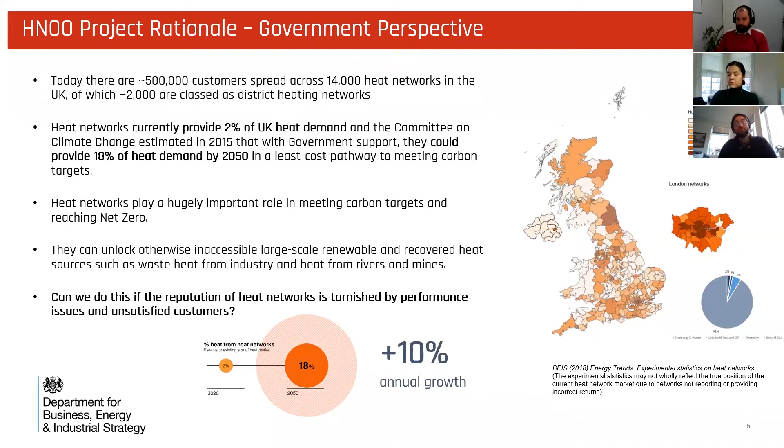However, can we do all of this if the heat network's reputation is tarnished by performance issues or unsatisfied customers? This is where the Heat Network Optimisation Opportunities project came along. So what's government's role in supporting existing heat networks? We had done in the past a number of discrete studies into some of the challenges with existing networks, but it's been a very difficult process within government to see how we can support existing networks effectively.

And what is it that is really needed? The HNOO program really gave us an opportunity to learn and understand what the optimization opportunities are. So this isn't only networks that are really struggling, but just ones that could do a bit better. Why do these opportunities exist? What can be done about them? Why is it not already happening? And what is the decarbonisation pathway for existing networks? So if you go to the next slide, please - what did we do?

We funded 21 separate studies across 21 separate sites, over 3 organisations, of which FairHeat was one, each with a unique approach to looking at optimisation opportunities. We wanted to present the findings as a technical business case with the project sponsors, typically the site owners or operators, then discuss with them what's going to happen next. What was really important for us in government was creating a dialogue between the project sponsor, technical consultants like FairHeat, and ourselves, to understand the issues and what we can do to help each other overcome them.

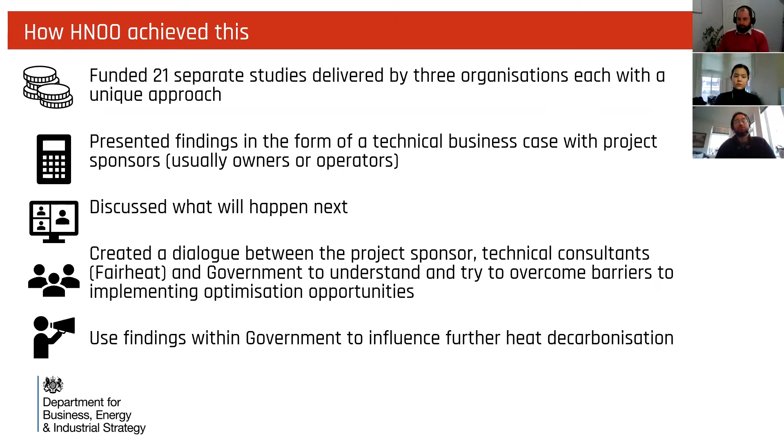The requirements we had were that it had to be existing residential heat network projects, both communal and district heating. They obviously had to have suboptimal performance, so there were opportunities to improve that. Another key requirement was that there'd be a lot of data available, because there needed to be objective analysis done, and it would really help build a business case based on hard numbers.

So the outputs of the project for each of the projects we worked on would be a robust business case for a series of potential packages of works. Those packages of works had to be cost effective, and they had to demonstrate that there'd actually be a quantifiable improvement in the performance of the heat network.

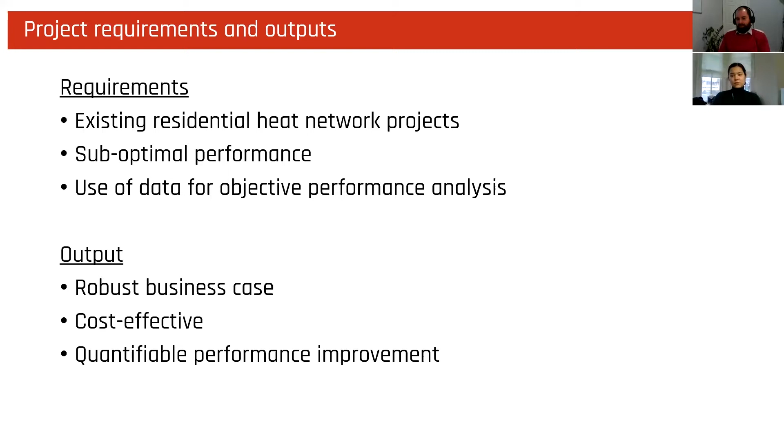So we approached a lot of organisations that we work with currently and asked them if they had any heat networks that fitted the bill.

The reasons that came back from clients about why they would like to include their heat networks were very high electricity bills, that some of the networks had equipment that was sort of 40 years old and the whole system was reaching the end of its technical life. There was a lot of maintenance issues with main equipment, boilers and HIUs in people's dwellings, lots of resident complaints and customer dissatisfaction, and they believed there'd be potential to improve the performance of those systems.

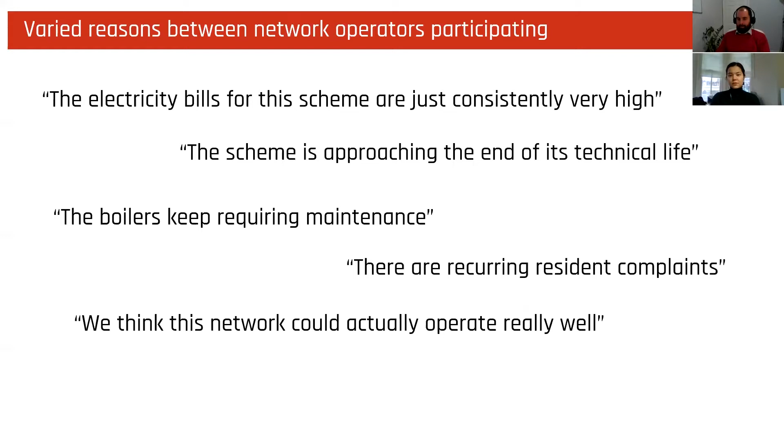Okay, so in total on this project, Joel mentioned that there were 21 projects in total that BEIS worked on. Of those 21, we worked on 10 of them. Of those 10, we were aiming, which again was a request from BEIS, to be as varied as possible, because we wanted to capture as much of the market.

So we looked at developments built sort of 50 years ago up to developments that were literally handed over the year before. Again, on scale, 74 units, a typical communal heating system in London, those kind of scales, all the way up to 950 dwelling units, which were big district heating systems. In total, across those 10 projects, there were 3,232 dwellings that we looked at as part of the overall project.

Of those 10, 9 were district heating networks. As Joel mentioned earlier, that meant there was more than one building connected to that heat network. In many cases, it was only 2 or 3 buildings - these weren't big district heating systems - and one of them was a communal network.

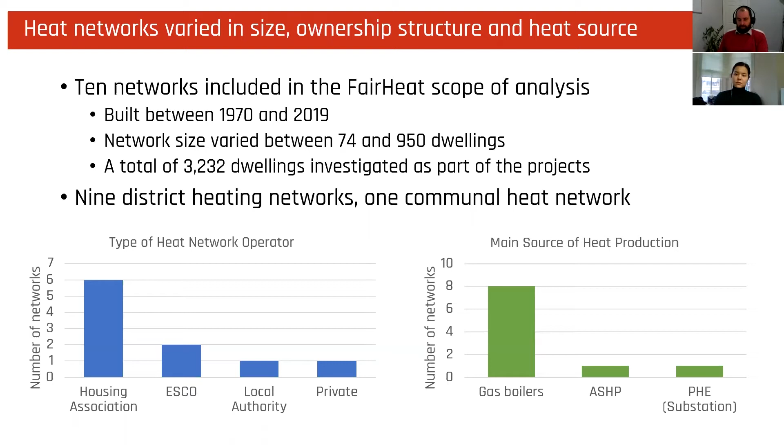We covered a broad range of heat network operators - social housing associations, local authorities, but also the private market, so private developers and ESCOs. The main heat production, these are legacy systems, unsurprisingly, around gas boilers were dominant. There was one air source heat pump project and one that was actually fed off an existing district heating system, so it had a plate heat exchanger.

The project methodology is we did an audit of the sites - that's data going to site, going to dwellings, going to the energy centre. It's very important to be hands-on, actually physically see how the networks are working.

Then there was a data gathering exercise where we collected operational data from the Guru pinpoint system and from any BMS systems they had on site. We reviewed the assets, the equipment installed, reviewed maintenance logs. We also interviewed or spoke with O&M contractors to understand what the legacy issues were on that site.

And then through that process, we could identify optimization opportunities by building an actual model of the heat network, and then coming up with a series of interventions and testing those interventions on the heat network, so that we could objectively see what impact that would have on heat losses on the system or the performance of the heat generating equipment.

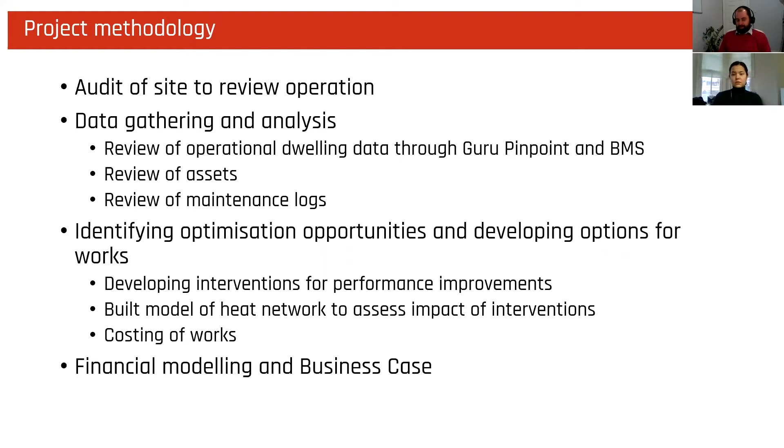And then we provide a full costing analysis of the capital cost to carry out the works. That information then went into financial modelling and preparation of a business case back to the sponsor. That business case would include typically 3 work packages, ranging from easy wins to very work-intensive improvements. So easy wins are things that could be implemented quickly, and then more work-intensive programs that will typically include things like replacing capital equipment.

On each of those work packages, we do a financial analysis which tries to incorporate all costs possible - not just capital costs of equipment, but also labor costs, project management, internal costs of the organization to manage the project, and ongoing management and maintenance costs. Through that, we produced net present value and IRR results for the different work packages, simple payback, and a sensitivity analysis of the project.

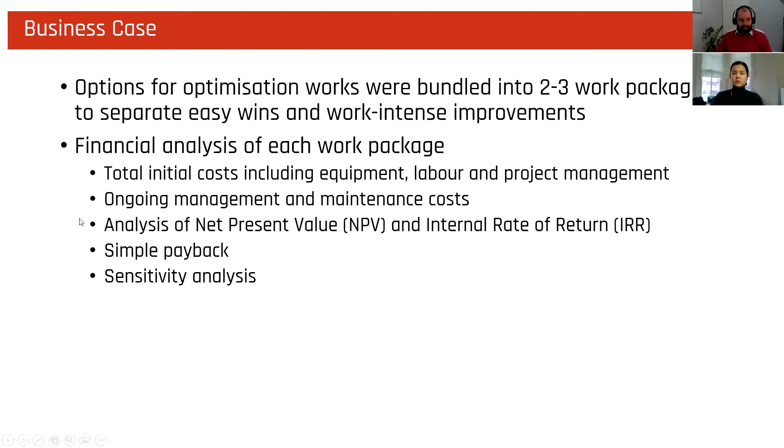And I'm just going to pass over to my colleague Lina, who headed up a lot of the program for FairHeat on this side, and she's going to run through some very high-level results.

So, okay, can everyone hear me? Hello? Yes, I can hear you. Perfect.

As mentioned by Tom previously, the suggested works investigated as part of this program were bundled into different work packages, where work package 1 would generally consist of the lighter intervention works, and work package 3 would generally consist of the most comprehensive works. Across the program of projects, the simple payback for improvement investments was on average less than 6 years, and for work package 1 the simple payback was on average less than 3 years.

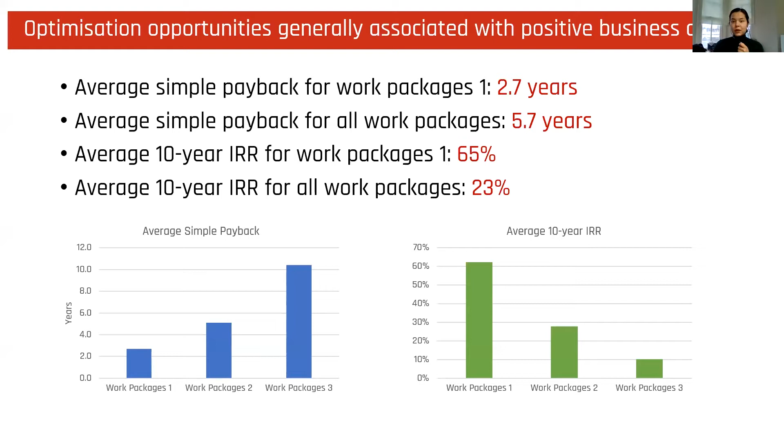Aside from being associated with quite attractive business cases, carrying out performance improvement works also has the potential of significantly lowering costs back to residents. We can see that already with work package 1, a significant annual cost saving is enabled. If we split that cost saving per dwelling on the network, we can see there is significant potential for cost savings to be carried over into lowering the annual cost for residents and end users. As more comprehensive works are carried out, the annual potential cost saving per dwelling increases.

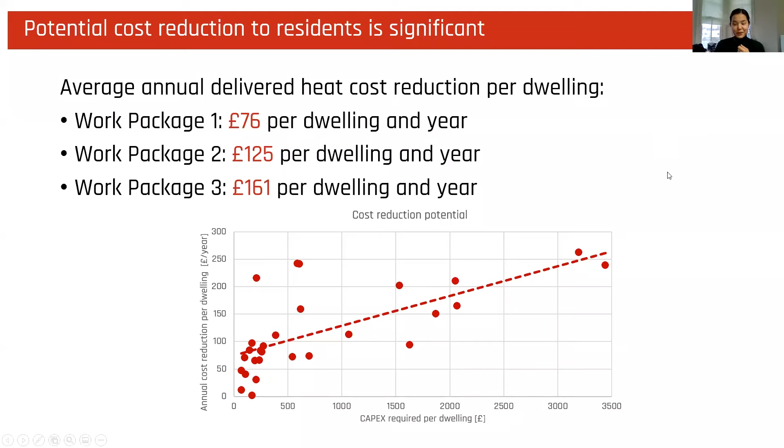Looking at some of the more specific interventions that are low cost but contribute with easy gains, we can see that in many cases there was oversized equipment, where pipework and radiators were found to be oversized, meaning system temperatures can be dropped without needing any more invasive works across the network. This is an item that will be further developed in detail by my colleague James later on in this session.

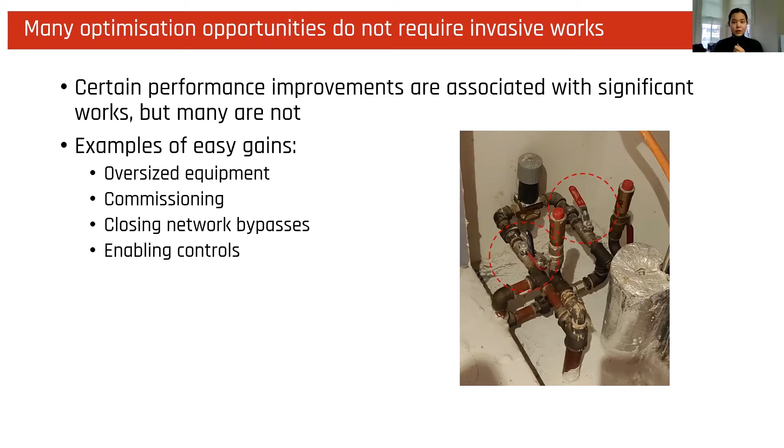Two other very common work items that were suggested, which are relatively cheap and very easy to enable, are enabling controls and carrying out commissioning of equipment.

We could see that 9 out of 10 networks had uncontrolled pump operation, which results in increased electricity consumption and cost. 8 out of 10 networks had uncontrolled plant operation, which results in decreased generation efficiency. 6 out of 10 networks had open network bypasses, which drives return temperatures, heat losses, and pump electricity consumption. 8 out of 10 had large portions of uninsulated pipework on the network, which drives heat loss. And all 10 networks investigated had instances of poorly performing HIUs. If you remember from the last slide, these are all items which can be rectified at a relatively low cost.

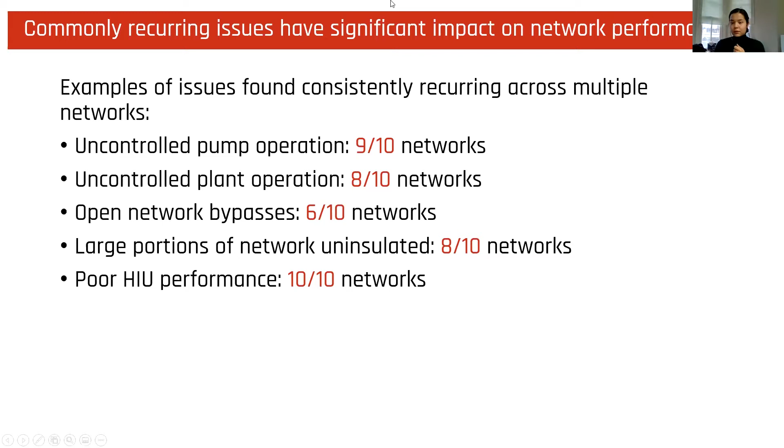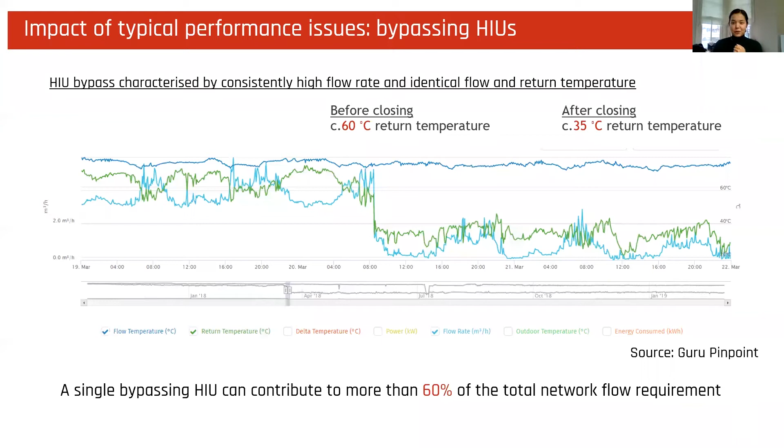If you're wondering why I'm going quiet, it's because there's a slight delay in me swapping slides over. There we go.

Most of the interventions we investigated were associated with positive business cases, and the analysis we carried out by default, with results like simple payback that I presented earlier, did not consider the cost of carbon, which is a theoretical figure aimed at addressing the cost of the negative environmental and social impacts of carbon emissions. Using figures for cost of carbon based on the Green Book by BEIS, we were able to include the cost of carbon in alternative business cases for each of the projects and work packages, in order to take into consideration and place value on the potential decarbonisation that would be enabled by the performance improvements.

We can see that if we take the cost of carbon into consideration, all the business cases improve significantly. For example, for work package 1, the average simple payback is reduced from 2.7 years on average to 1.9 years.

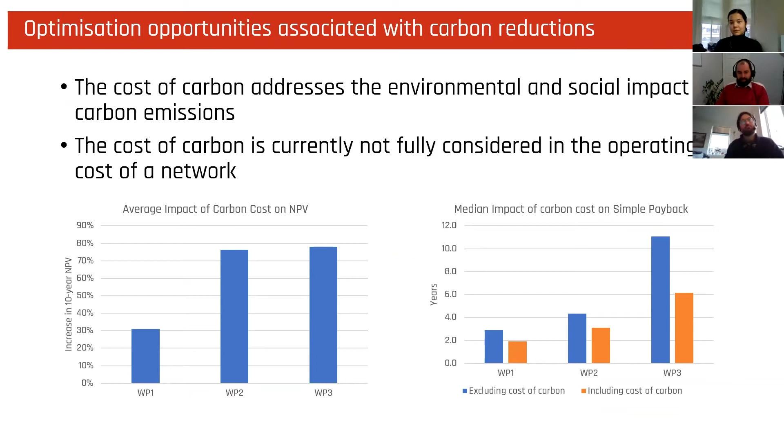Excellent, thank you, Lina. I think that's just going to hand back over to Joel. So that was the conclusion, the results from our perspective. I think from BEIS's perspective, Joel, what were your conclusions and what were your next steps?

So, that was really helpful. Thank you for going through all the detail. As a fellow engineer, I found this whole project really interesting, and I was really grateful that I wasn't the one running around in the plant rooms as well. So I got the benefits without getting covered in cobwebs.

So for BEIS, there are several elements to the conclusion. One is the opportunities already mentioned—these energy, emissions and cost savings are really a benefit to everyone. There are direct benefits of saving money for either the operator or the end user, the heat customer. There's also an air quality benefit as well as a carbon benefit. As I'm sure we're aware, a large number of these heat networks can be in quite densely populated areas, which would have other air quality issues. So it's good to know there are things that could be done fairly easily that can alleviate some of these environmental and health issues.

There were lots of common themes, or you could call them common problems or common solutions—depends which way you want to look at it, glass half full or half empty. As highlighted by Lina's slide, the number of sites that had fundamentally fairly straightforward problems that could be solved was really interesting. And what's really good about it, although it's a shame they exist, is that we could then utilize these common problems and solutions to make a really big difference across the whole sector, because through a bit of guidance and support, these things can hopefully be significantly reduced.

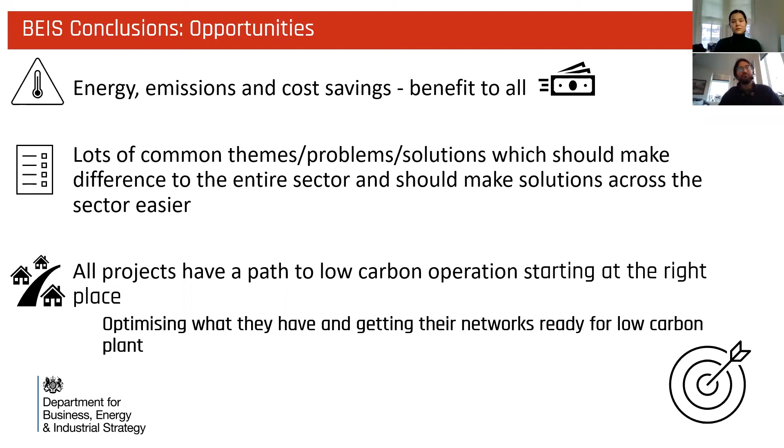So within the conclusion, there were other challenges. It goes without saying that COVID caused some pretty significant challenges all round. This project started well before the first lockdown, and there were a number of points where we had to review how we were going to move this forward. I'm really grateful for the team at FairHeat because they did a fantastic job. They didn't let the inability to go and do all of the investigations they wanted to do get in the way of being able to deliver really high quality outputs that can make a significant difference to the sector and to the sites that they looked at.

There were technical challenges, but most of the technical challenges I think are solvable. The reports show that, and I'm sure at some of the other FairHeat sessions they talk you through some of the quite solvable technical problems. The ones that really became quite interesting in terms of a stumbling block, probably for more people - as an engineer I quite like the technical problems - were these institutional ones.

So there are challenges on how the structure of the organization can prevent the receipt of benefits. What I mean by that is that if you're not allowed to hold on to a financial benefit from doing something, it's very difficult for you to make a case to invest. Or even if your organization can take benefit from some savings, if it's set up in a way where you've got a maintenance budget on one side, a capital works budget on the other, and another side that deals with ongoing operating costs, and they don't talk to each other, you then have a very difficult challenge of saying, well, this project can pay back in 5 years - can I have some money, please? That's a really interesting challenge, and it's different for each organization we worked with.

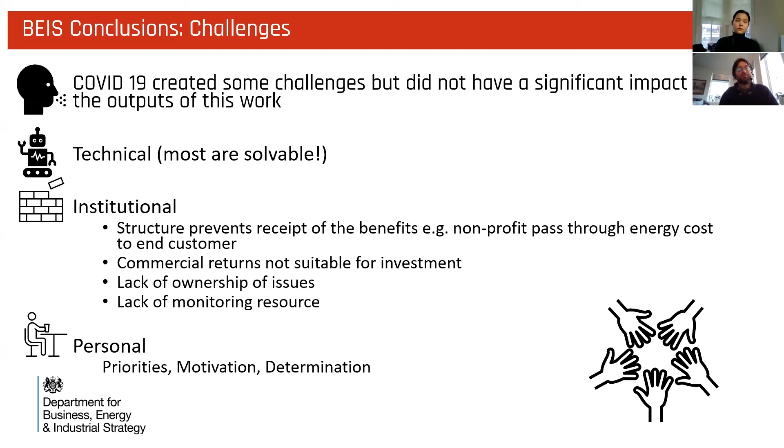So what's next? Some positive stuff, because this was a really interesting piece of work that we did, and we got some really good findings from it. So there's a watch-this-space on a program called the Heat Network Efficiency Scheme, which is the follow-on from HNOO, Heat Network Optimisation Opportunities. We're developing a project to support the part funding of operational improvements in these networks - finding a way to overcome some of the commercial challenges around the recommendations put forward by the reports, like the ones done by FairHeat and others in the market. We're going to announce more details on that later this year, but as seen from the data here, that can significantly reduce emissions and costs for people.

A really big part is feeding back these findings into future regulation and funding programs - the Heat Network Market Framework, and the Green Heat Network Fund, a £270 million successor to HNIP that can be used for low carbon plant upgrades. I was asked whether there's an issue with requiring reasonably low flow temperatures, sub 60, and the findings from this work allowed me to answer with reasonable confidence that most of the projects we looked at had little if any problem reducing flow temperatures to 60 degrees. That was a really interesting finding that fed straight back into other areas happening within government.

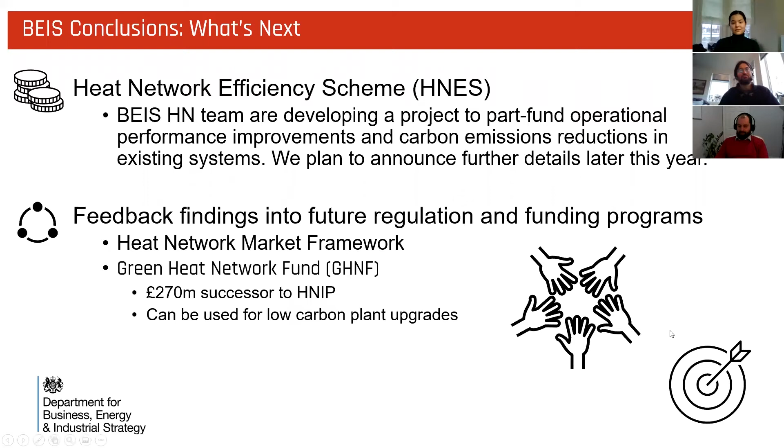I just wanted to say there's a huge amount that went on in HNOO, as you can imagine, with 10 projects of different types, lots of common themes, but also lots of different issues that we discovered. We've got 20, 25 minutes here, and we're going to have an opportunity to go far more in depth into this in 2-3 weeks' time.

We're having a morning coffee webinar on Wednesday the 17th of February, which will also be attended by BEIS, where we can go into a lot more detail about what we found, what recommendations we have, and the challenges. Thank you both - you'll stay on for the panel discussion, but thank you both for your input.

Another comment you made, Joel, segues perfectly into the next presentation - about how to optimize heat networks and existing systems, and now, still on the subject of existing systems, how are we going to make them compatible to integrate with low carbon technologies? As we saw, most heat networks at the moment run off gas and fossil fuels - how are we going to transition that? A lot of it is around temperatures and optimizing the performance of existing systems. So moving on to the next presentation.

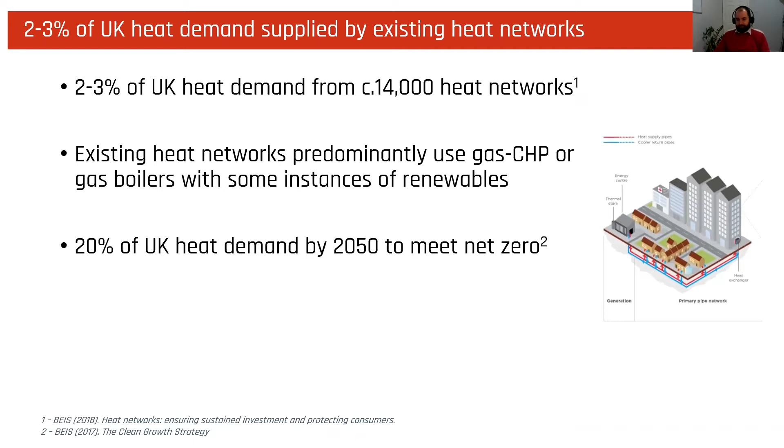So what that means from a generation perspective - and apologies for hydrogen fans, but I'm going to completely ignore hydrogen here - that probably means there's going to be a significant electrification of heat, through heat networks as well as through electrification of heat for individual houses.

Why is that? This graph shows the carbon intensity of UK electricity since 1970, up to just pre-2020, and then a series of projections from 2020. It shows a drastic reduction, particularly post-2010. Between the mid-90s and 2010 there wasn't much movement, but in the last 10 years there's been a significant reduction in the carbon intensity of the electricity grid.

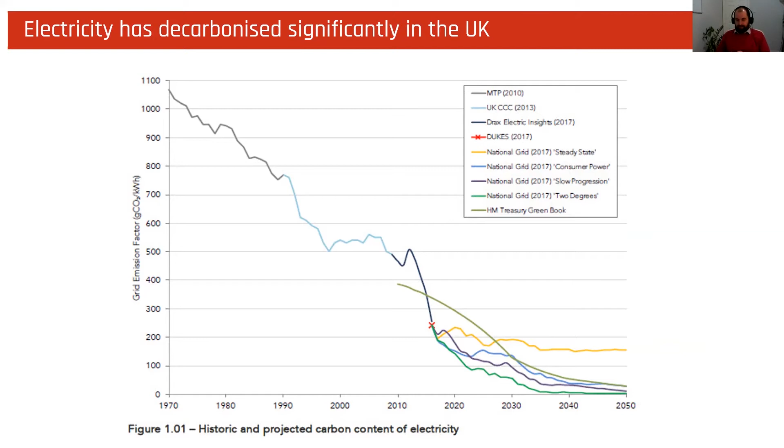What that means from a heat generation perspective is that heat pumps - this graph shows the carbon intensity of heat delivered to a resident with some assumptions. The blue line is gas boiler: natural gas going into a boiler at 85% efficiency, a good rule of thumb, with 15% losses on the heat network, which effectively means delivering a carbon intensity of heat of about 0.3 kilograms.

There could potentially be some decarbonisation of the gas grid, but it's not likely to be significant towards net zero. So assuming that stays fairly stable from now to 2050, in comparison, the orange line shows the carbon intensity of heat delivered to residents on a heat network via a heat pump.

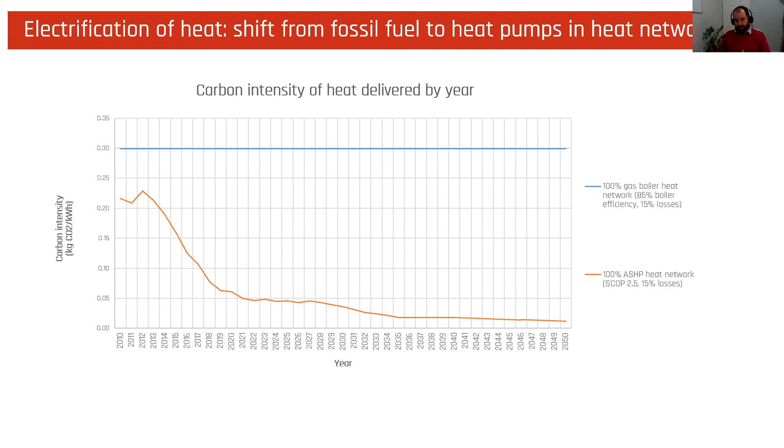This particular example assumed an air source heat pump running at a seasonal COP of 2.5, which is actually very conservative, with the same heat network losses. You can see already at 2020, the carbon emissions from an air source heat pump compared to a gas boiler is significant, and that's only going to drop getting closer to net zero by 2050.

However, we can't just fit heat pumps into legacy buildings. Legacy buildings tend to have higher operating temperatures, whether that's due to hot water cylinders or radiators, and the fabric efficiency isn't so good, so they need to operate at higher temperatures.

Unfortunately, the efficiency of a heat pump is governed by the temperature that you produce heat out of that heat pump. We've taken a very common heat pump on the market, looking at the efficiency - the COP on the left axis is effectively the efficiency of operation. If you have a COP of 3, you put in 1 unit of electricity and get 3 units of heat out.

For example, at an ambient temperature of 10 degrees outside, that same unit, if it was trying to generate heat at 65 degrees, would be operating below 2.5, something like 2.3. If it was only having to produce heat at 55 degrees, it would be up near a 3. This has significant impact on the cost of heat to residents as well - the lower the COP, the more expensive the heat generated by that technology is.

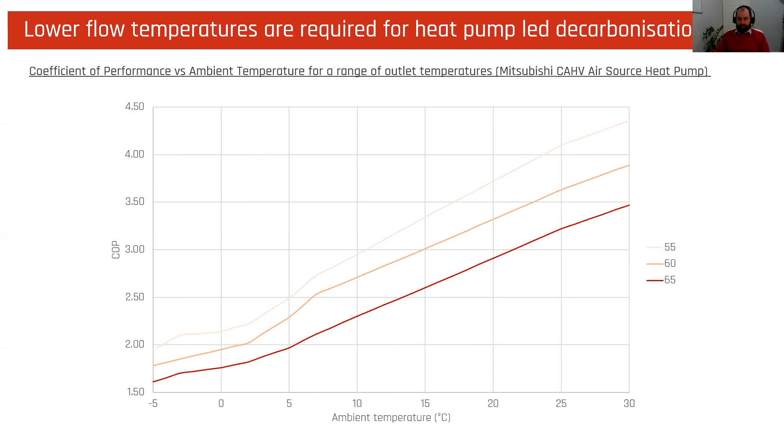So just to move away quickly from heat pumps - we can see the challenges: we need to get temperatures down. Here's how we've approached getting networks to the stage where heat pumps can be used with that heat network - we go through this process.

First, we measure the performance of the heat network, usually through data if we can get it, or as with the HNOO project, through site audits, observations, and interviews. Once we've gathered that data, we analyze it and come up with interventions, proposals, and the business case. The HNOO project effectively took us through sections 1 and 2 of our typical improvement process cycle.

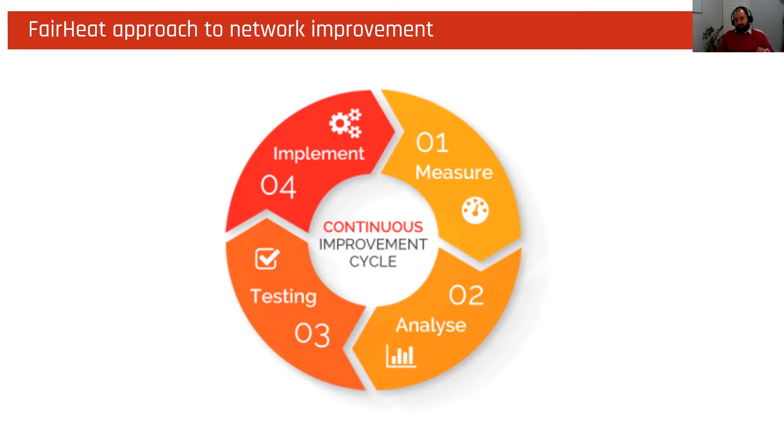The next stage would be testing those intervention measures and proposals, then assessing the impact. If they prove successful, we fully implement and roll out those improvements across the entire heat network.

Here's a quick example of the type of data we'll be looking at. This is from a single dwelling - the dark blue line shows the network flow temperature, and the dark green line shows the primary return temperature. This shows an example of an HIU that's performing poorly - the close gap between flow and return temperature shows the unit's not working particularly well, and there's an issue with that unit.

This would be a good example of where we want to go into that dwelling and look at how that HIU is performing - is there something different about the way it's performing compared to other HIUs? Through gathering that knowledge, we can then propose interventions to roll out across the site.

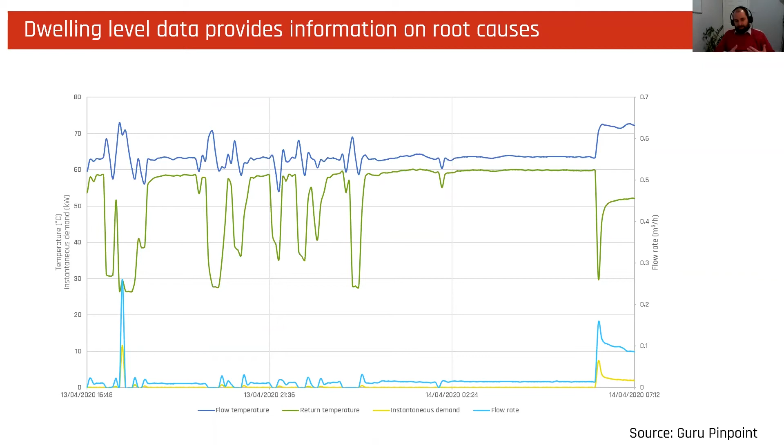Again, something brought up earlier in the HNOO presentation - luckily or unluckily depending on how you want to look at it, unfortunately there's been a significant oversizing problem historically in the UK building industry. Pipework's oversized, pumps are oversized, plate heat exchangers are oversized, and there are oversized radiators within people's dwellings.

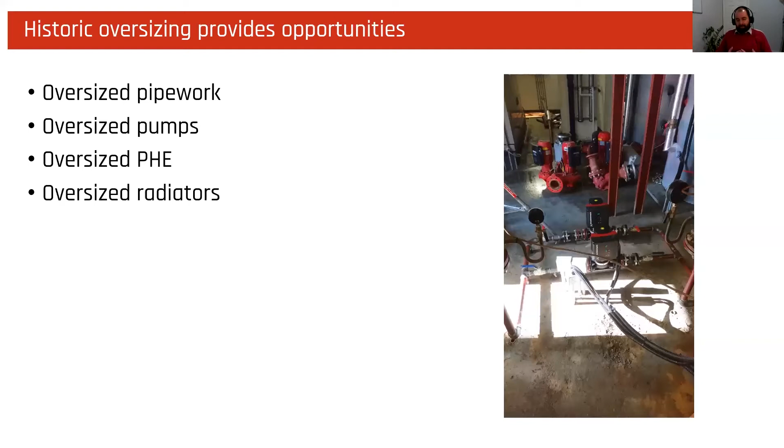This luckily now is providing us with a good opportunity - we can run the systems at much lower temperatures, and they can still work with the same pipework, radiators and pumps, which gives us an opportunity to drop temperatures without having to do very expensive intervention works.

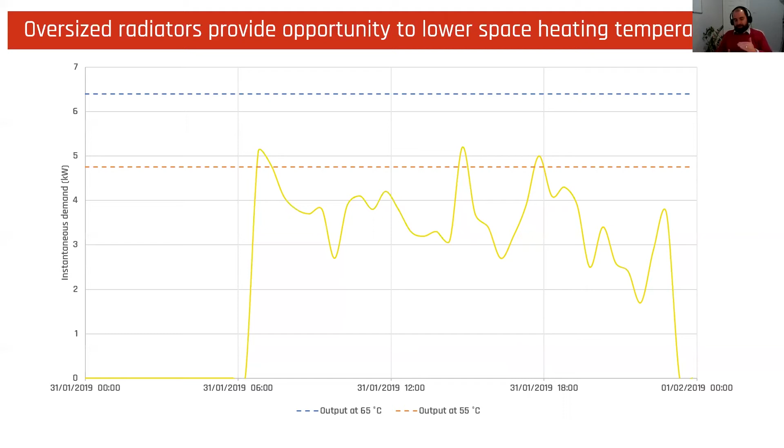That dwelling actually was only drawing about 3.5 to 4 kilowatts. You could actually drop the whole temperature of the system down by 10 degrees and there'd still be comfortable headroom. So that's already shown that we've got an opportunity to drop the temperatures of the system without having to replace a lot of equipment within people's dwellings.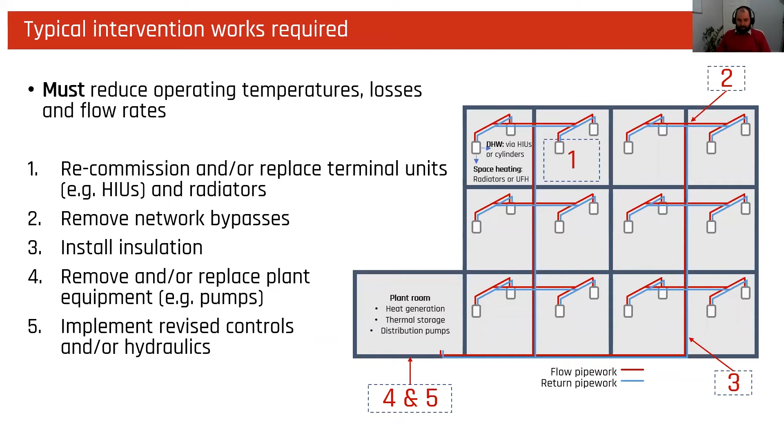I'll quickly go through this slide, but again, similar to the HNOO project, these were the kind of issues we found: recommissioning, network bypasses, insulation, replacing plant equipment, and implementing better controls of the plant room.

Quickly before I hand over to James to talk through the Goat Wolf project - this was a Notting Hill Genesis project, 86 dwellings, all underfloor heating and instantaneous hot water delivered by HIUs. So James, over to you.

Good afternoon all. The purpose of this is just to go through a case study and really just focusing on how actually practically these works proceed, going forth from where we've identified the issues from the end of HNOO through to actually implementing on site.

To start with, we start in the typical process. So we determine the key issues being experienced by bringing together all of the available data sources, and also bringing in the stakeholder information and then analysing the data.

We obtain information through discussion with residents, Notting Hill Genesis themselves, the O&M contractor, and also conducting a rigorous site audit ourselves, which included detailed dwelling inspections, and then also having a review of all the available data on site, namely from the heat meters, but also from the BMS.

What came out of that really was that we had issues on the site which consisted of overheating of corridors. It's commonly found that there were high ambient temperatures in corridors, which is a resident comfort issue.

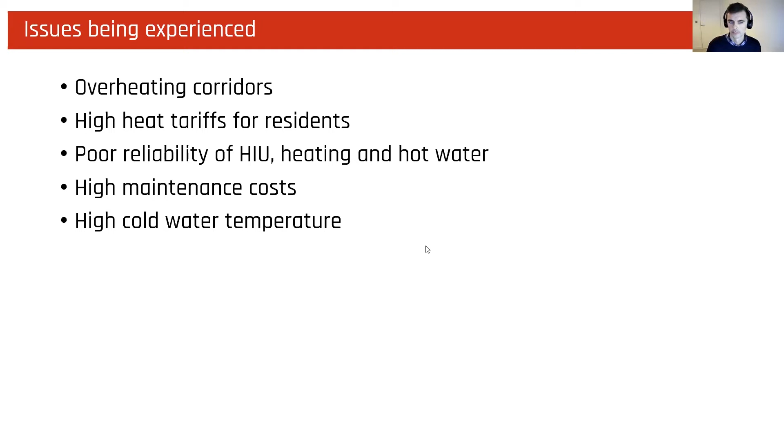Based on the audit findings, we developed a package of interventions, and really this was just focused on addressing those root causes of the identified issues.

In the dwelling, that consisted of replacing the HIU to get over those issues identified with reliability on the existing HIU, but also we wanted to take this opportunity to retrofit a metering system that would allow us to remotely monitor the data. That would both help in the short term, to verify the success of the works, but also long term on the maintenance of the system.

We also identified areas where we could recommission the heating system and improve the residents' heating controls.

Looking back at the plant room, there are a few aspects that we identified as room for improvement. The pumps were oversized, and if we were to replace these, we could actually bring those energy costs down. There was a similar case with the plant room controls and the current hydraulic arrangement.

Again, talking about heat losses, the heat loss from pipework was higher than what we'd expect to see. So really, there was a re-insulation exercise there because we did identify areas of non-compliant insulation.

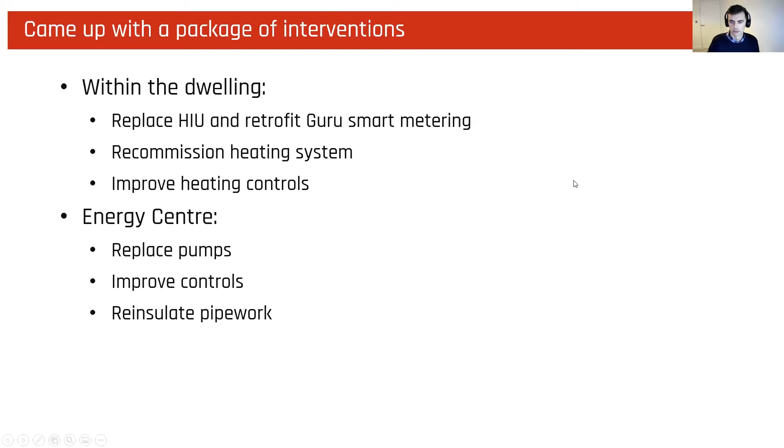Sorry, moving on to the next slide.

So the dwelling works, this shows the pre and post works HIU replacements. Now, the old HIU is not performing well. So with the new HIU, we selected a model that was more reliable, and we also engaged the HIU manufacturer to ensure we made this a bespoke solution. As you can see on the right here, we had to procure a bespoke solution to ensure that the pipework and insulation was correctly orientated.

Two key aspects of the success of these works in the dwelling were resident engagement and communication. It's really important to ensure that the residents are well aware of the works and actually buy into it as well. But again, as Tom mentioned, a key part is conducting a pilot exercise to monitor how the first set of dwellings has been installed and implemented, and also to capture those lessons learned to implement on the rest of the sites for the full rollout.

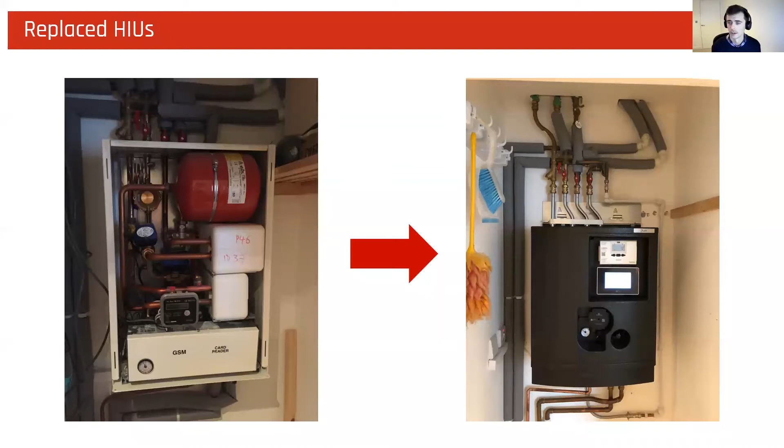And as I said, on the metering system, this actually allowed us to verify the success of the works and ensure that the HIUs are maintained appropriately.

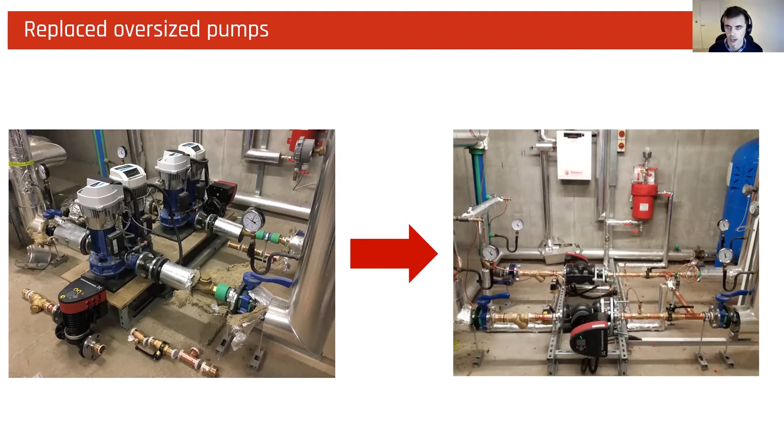Moving on to the plant room, so one key aspect of the works was replacing the oversized pumps. Now, this is a great pre and post works photo. It is quite striking to see how oversized the pumps were originally. And as you can expect, we actually found that the pump electricity consumption on this site was very high. But another key point to note here is that even though we're replacing the pumps with smaller pumps, the smaller pumps are still more than enough to maintain the required performance and reliability of the heat network.

So looking at the impacts of the works, on this graph here, we show the plant room flow temperature in blue, the return temperature in green on the top graph there, and the flow rate is shown in light blue on the bottom graph. Now, the system's currently operating at 70-degree flow temperature, and

this graph shows the final HIU being replaced. Now, what can be seen here is we're actually getting 60-degree returns, but as we bring in that final HIU, the return temperature drops by 20 degrees. Now, at the same time, there's a significant drop in flow rate.

This is great to see because we bring down those heat losses from the network, but also we bring down the pump energy consumption, because as you can see on the light blue line here, the pumps are actually reacting to demand. So they're reacting to the flow rate on the network as per the respective hot water and heating demands throughout the day, which wasn't happening before.

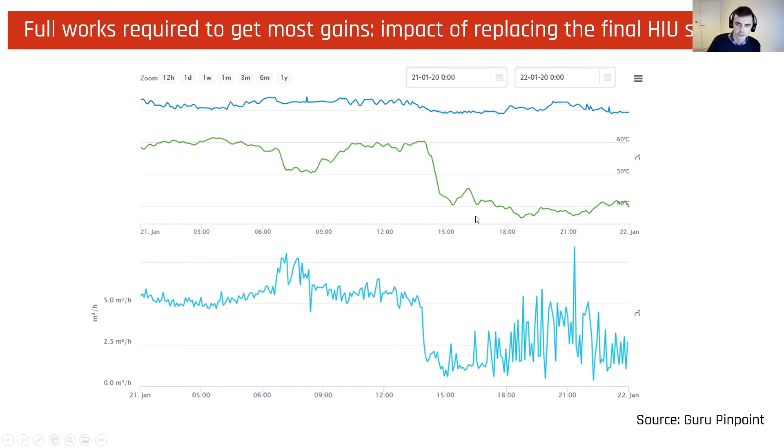So we have the flow temperature at 70 degrees, and really the discussion here is how do we get it down? So actually we could reduce the flow temperature here down to 65 degrees initially. That shows that we've had a big impact on the system heat losses and also helped prepare the system for future decarbonisation. So at the moment it's currently operating at 65, 40 or 45. The next step is to look at how we can bring that down further. The key point on this site is that we don't need any more invasive works. It's simply a case of tweaking the performance of some HIUs and going forward with some commissioning adjustments on them.

In terms of lessons learned from this, really, I can't stress the importance of high frequency data. If you can't measure it, you can't improve it. So if we have good access to data, we can quantify the issues and also improve the system in line with desired outcomes. I think that relates to heat networks in operation, but also if you were to do these sort of works, make sure the data analysis you have in place allows you to monitor the system.

The dwelling often dictates the heat network performance, and typically it's overlooked. Again, I can't stress the importance of engaging with the residents early and often, because they really need to buy into these works and see the importance of them. On this project, we worked with a company called Cycus. It was great to see that they engaged in the project and actually committed to the outcomes of it. We really need to make sure that contractors doing these sort of works are aware of the issues. I think at the moment that's not the case, but as we see more upskilling in the industry, that will be a crucial step to overcome.

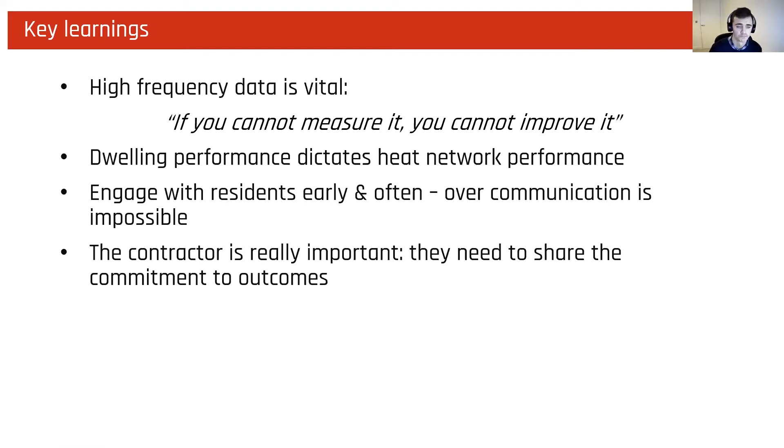In terms of outcomes, we saw reduced heat losses, and also we have great visibility on the ongoing performance of the network. We haven't heard of any reports of overheating in corridors. There's also greater reliability of the network, so the provision of heating and hot water on site is more reliable, and this ultimately leads to greater resident satisfaction

on the heat network. Now, at this point, I'm going to bring in Laura, who is going to share some of her experiences on the project, then also some wider business related aspects relating to Notting Hill Genesis' path towards decarbonisation.

Great, thank you James for that. That was really good for me to listen to as well.

In terms of feedback, internally Goats Wolf is perceived as a really successful scheme, both in terms of implementation, because FairHeat and suppliers made sure it was designed around resident needs, resulting in much better access rates than we usually get on other projects, and also in terms of outcomes. Everything James just mentioned, we've got a more reliable system, tackled issues around overheating, and the efficiency improvements have a positive impact on the tariff. So overall, a positive result for Notting Hill Genesis.

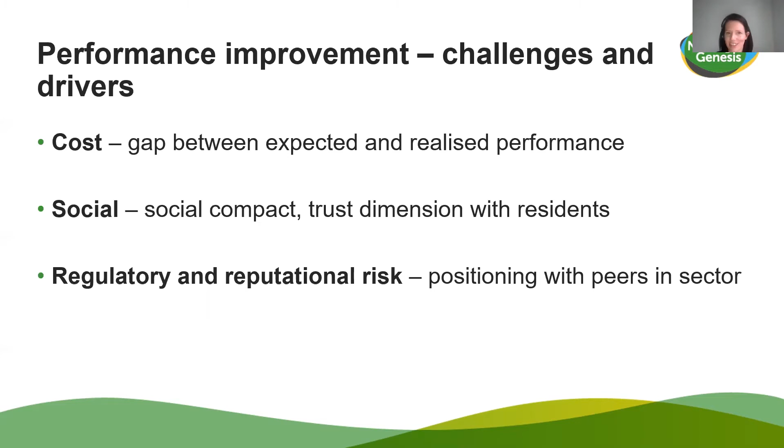We can't get this over overnight. We can't upskill our supply chain overnight. We can only do that with a plan. And it's likely that this plan will project further into the future when we start to think more about decarbonisation.

The second point around planning is we need the investment that goes with it. But in order to build a financial business case, we need an information base. So we know that not only can data help us identify some of the problems, but it's only really with the data that we can identify the potential cost savings and benefits.

So the challenge for us really in managing such a diverse portfolio is that we have multiple different types of meter technology and AMR systems. So how do we unify our data pool? And that's particularly important for managing performance improvement on more of a day-to-day basis.

So the second thing is about integration, and I think this is a point that Joel picked up that is probably quite specific to housing associations, in that we work across different departments. So typically there are different teams responsible for designing and operating heat networks.

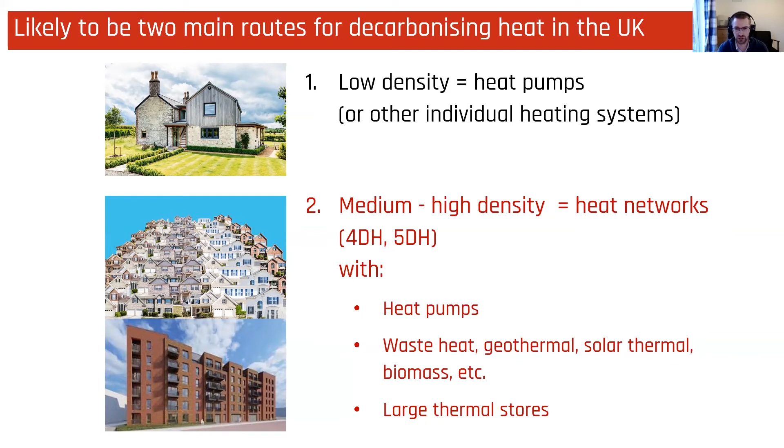So I'm just going to talk through some of those challenges, but in terms of why heat networks for those medium and high density developments - it's technology agnostic, which means it can be served by a multitude of different technologies, and they can actually be changed over time. So it's a vehicle where we can decarbonise over time and transition into lower and lower carbon technologies over time.

As heat networks become more established in the UK, particularly in London and some of the other cities that have embedded them in their strategies, we'll eventually have some system interconnectivity. That means we can play around with energy sources and optimize running cost and decarbonisation at any given time.

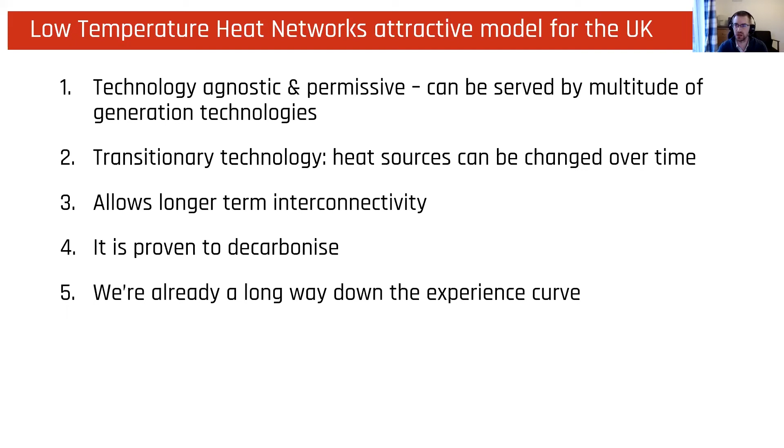We know it works, we know it's proven to decarbonise. Gareth in the morning mentioned the Scandinavian models and how they've used heat networks to decarbonise heat. In the UK we're actually a long way down that experience curve. We're talking about how to improve some poor performing schemes that have been operational for a while, but we've also come a long way in the new build area - the more recent heat networks are getting some really high performing results coming through.

So some of the technical challenges I've come across, and the new build team has been trying to help clients solve over the past 12 months - it all starts from a heat pump perspective, both in new build and existing heat networks, in minimizing the generation and distribution temperatures as far as possible to boost heat pump efficiencies. Maximizing thermal storage is a common theme through all heat network projects, but it has challenges in terms of where to locate that thermal storage and how to design it.

Technology selection - not just jumping to a default air source, actually challenging at the earliest possible stage to consider others, and also the impact that different technologies have on site-specific constraints. Then plant location strategy has been a really common theme for me. That's often one that gets revisited later in a project's journey, because decisions were made where the impacts weren't fully understood at the time, and then we have to start from scratch a little bit again.

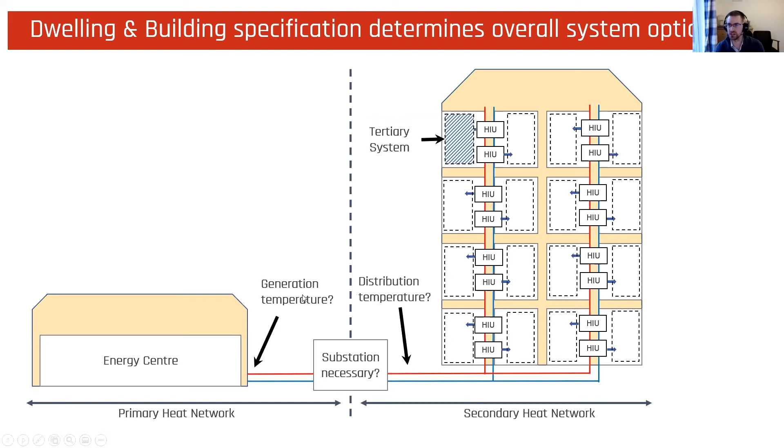So in terms of minimizing distribution temperatures, it's that thought process of: I'm not just going to jump straight to my energy centre design, I'm going to start a new build development by thinking about what temperatures do I need to get to the end dwelling. So in the tertiary system, space heating, domestic hot water - what temperatures do I need to distribute at? Do I need substations? Are they actually necessary? Can I remove them? Because every time I have one, I get a jump up in temperatures, so that I then get back to what generation temperature does my energy centre need to produce? And is that suitable for the heat pump technology I've got in mind?

As well as heat losses, this distribution temperature is all about, particularly for air source, improving the efficiency of the overall system by not asking it to operate at an extremely high temperature. This is the Mitsubishi chart, taking an annual average temperature we'd typically see at 10 degrees. The difference between operating the system at 55 as opposed to 65 is a 36% increase in efficiency at that ambient temperature. So there are massive gains to be had by getting the distribution system temperatures as low as possible.

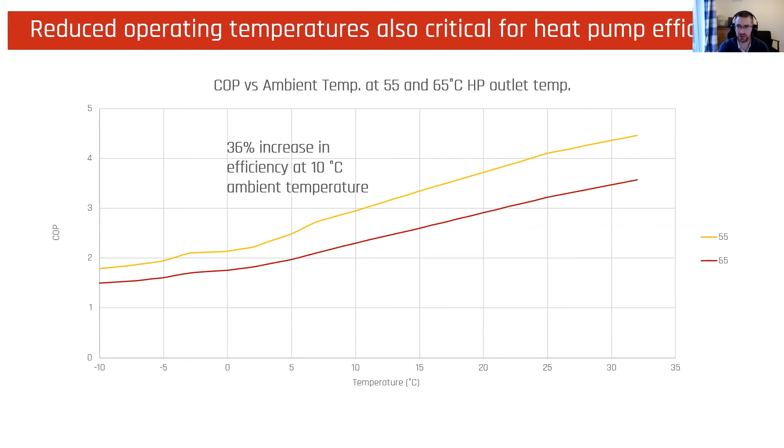And that really starts at stage 1, stage 2 design. In new build, the goal is 60 degrees - the maximum we really want to be distributing at for heat pump systems. When we've got twin plate HIUs delivering instantaneous hot water and space heating, we want a 10-degree forward approach from what we're delivering to our HIU from the heat network to what we're delivering on the dwelling side, particularly with space heating systems, which puts a threshold for 60 of 50 degrees on our dwelling systems. And that has quite big implications for space heating systems.

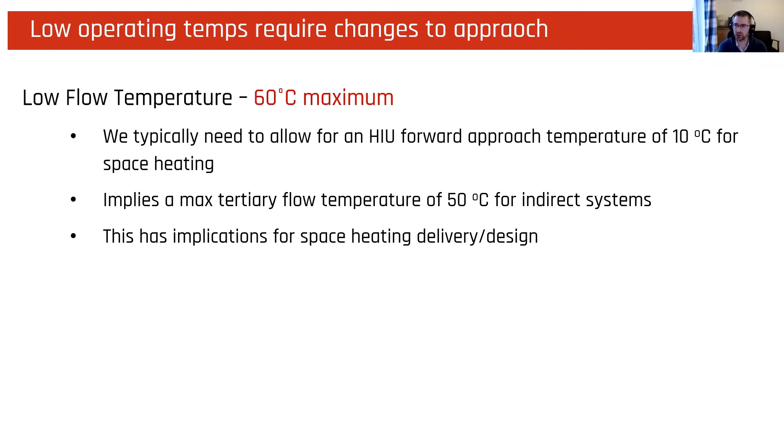That's one of the most common issues we come up against when trying to integrate heat pumps on new build developments, because 50 degrees is quite low compared to conventional tertiary dwelling heating systems. This diagram shows 60 degrees coming in from our heat network to the HIU and supplying 50 degrees to our space heating system. For underfloor heating, that's not a problem - most commonly we'd see underfloor heating systems designed at 45 flow temperature, so that can easily be delivered from 60-degree flow temperature on the network.

But for radiators, and a lot of developers have done radiators for a long time, that's what they're comfortable with, 50 degrees is a lot lower distribution temperature than typical. We've moved from 80 degrees down to 70, and in some cases start to move to 60, but 50 degrees is a step even further. These radiators start to become quite large. So while technically feasible, they do add cost, and they really need to be considered very early on in the architectural process.

The alternative is to go for a direct system, which is a real challenge on tall systems because the pressures become untenable to enter people's dwellings. But it is an option where you remove the plate heat exchanger from the HIU and just have it for the hot water, and the space heating goes direct through to the heat network, which means we don't need that step down in temperature, and we can pass that 60 degrees straight through and get 60-degree flow temperature to the rads, and they become a little bit smaller than the 50.

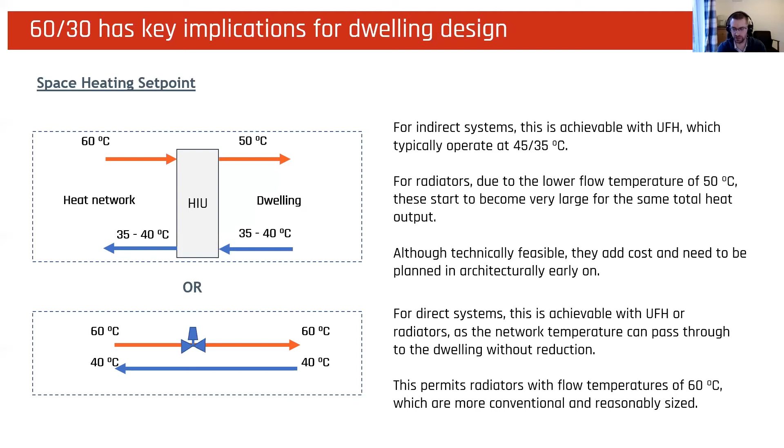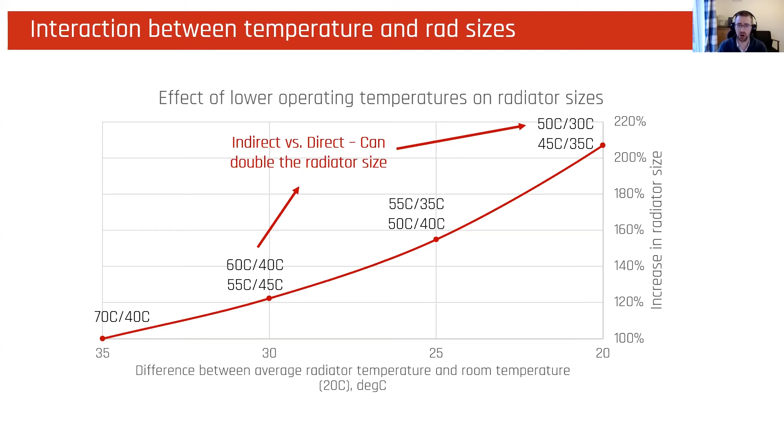There are also spatial constraints around how much radiators eat into the space of the living room, how much wall space do I have, do I need multiple radiators where I would have previously got away with one? These are all things that need to be considered very, very early on to make sure that the 60-degree flow temperature is actually feasible.

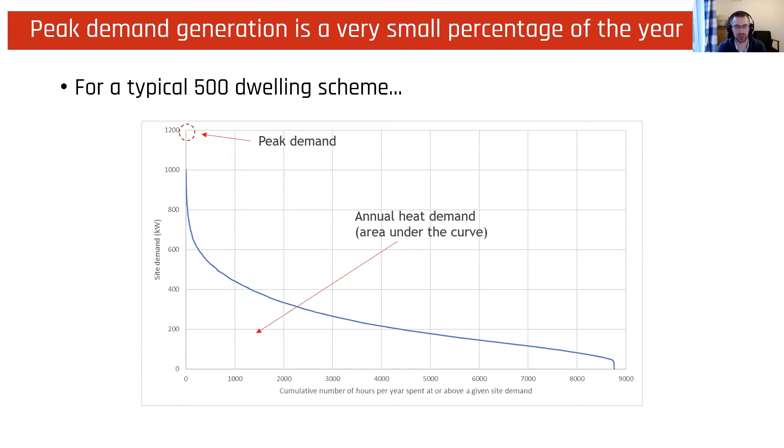The next thing I'm talking about is maximizing thermal storage. The reason thermal storage is so important for optimizing heat pump design is because of the nature of residential heating and hot water demand being extremely peaky. We have really short duration, but large demands that represent the peak demand when we have a coincidental coldest day outside in the morning when people want hot water, we get a surge in demand. But for most of the year, the demand is actually like a base load, very low level, which kind of divorces what we want the heat pump to be doing for our base load generation from our peak demand situation. This graph is showing the amount of time spent at different demand levels during the year.

For 90% of the year, we actually typically see heat networks sitting below 50%, actually below 45% of the peak demand. This is for a typical 500 dwelling scheme where the peak demand is around 1.2 megawatts, 1200 kilowatts. And actually for 90% of the year, 90% of the heat demand is occurring below 500 kilowatts in this example.

Moving further down the curve, 80% of that heat demand is occurring below 35% of peak, and 50% is occurring below 20% of peak.

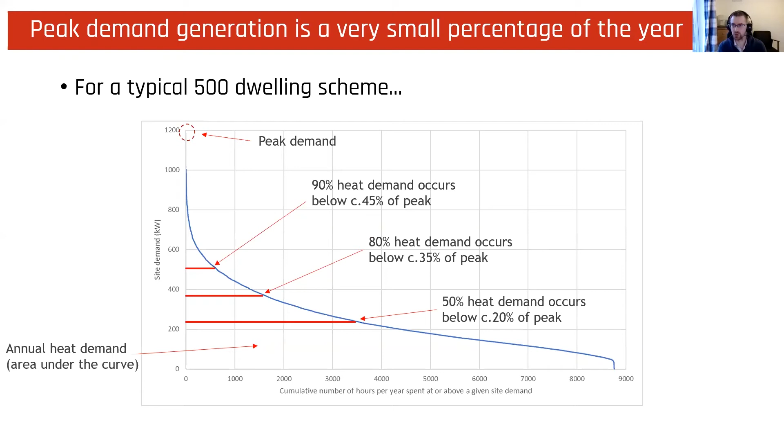When we start to think about the role of heat pumps, quite an expensive technology in comparison to gas boilers in terms of pound per kilowatt, what we're asking them to do, this becomes quite a powerful design tool in terms of how we think about sizing our systems.

For example, using the same 500 dwelling scheme, we can provide 20 to 25% of the peak demand through heat pumps by sizing them at, say, 225 kilowatts. But in combination with a thermal store around 20 cubic meters, we can meet 80% of the annual heat demand. Then to provide that additional 20%, we have the boilers doing some peak loading. It can either be a gas boiler or an electric boiler, depending on the constraints on the site and whether gas is in the mix or not.

This becomes quite powerful when you compare it against trying to do peak demand solely through heat pumps—1200 kilowatts of heat pump. One, it needs a lot of space, and two, it's extremely expensive. So these are the kind of considerations, using thermal store to play around with the difference between peak demand from the site and when the heat pump can operate, to really reduce that total heat pump capacity while still meeting the end user demands.

I think it also becomes really interesting when you push this boundary to say, well, what if I want to deliver 95% of heat from my heat pump and thermal store system? Actually, it doesn't mean increasing that heat pump capacity all the way up that peak demand curve so that you're installing a megawatt of heat pumps.

You can push it up just to 30, 35% of peak demand, increase the thermal store that bit more. For a scheme such as this, you can have a heat pump capacity of 350 kilowatts, about 35% of peak demand, some large thermal stores, and that circuit on its own could do 95% of that annual heat demand. Then you're only asking your boiler to do 5% of the annual heat demand.

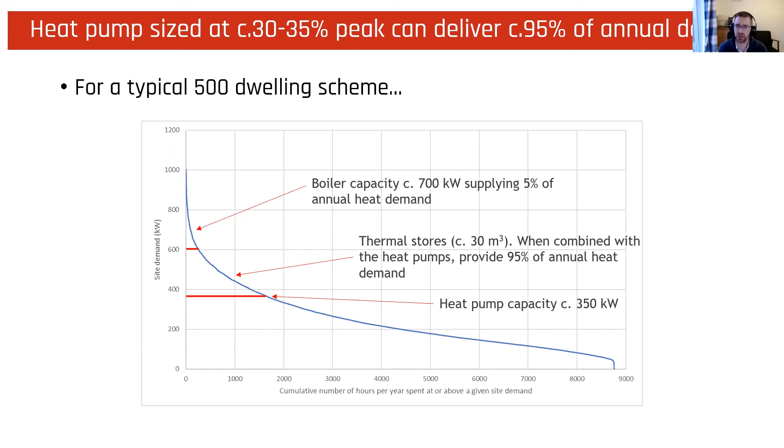In terms of the hydraulic design of thermal storage, I wanted to flag that building control compliance, particularly in the London Plan that's coming through, means promises made at energy strategy stage are going to have to be delivered against, and we will have to report operational performance data and prove that we're delivering against those energy strategy commitments. For this, we need hourly load models to make sure the design tools we're using are accurate, and we're getting really good accurate load estimations to size our heat pumps and thermal storage to meet those promises.

The designs have got to be really well thought out in terms of their hydraulic arrangement of heat pump, thermal store, boilers, buffer, control valves, control logic, and the overall controls philosophy that really gives us the guarantee that we will utilize those heat pumps as much as possible and achieve that 50, 60, 80, 95%, whatever the energy strategy promises, through the design.

So if we look at what's happened historically with CHPs, that simply hasn't happened. But that won't be the case in terms of compliance anymore. So utilizing that thermal storage is absolutely key to getting the most out of your heat pumps and not oversizing your heat pumps as well.

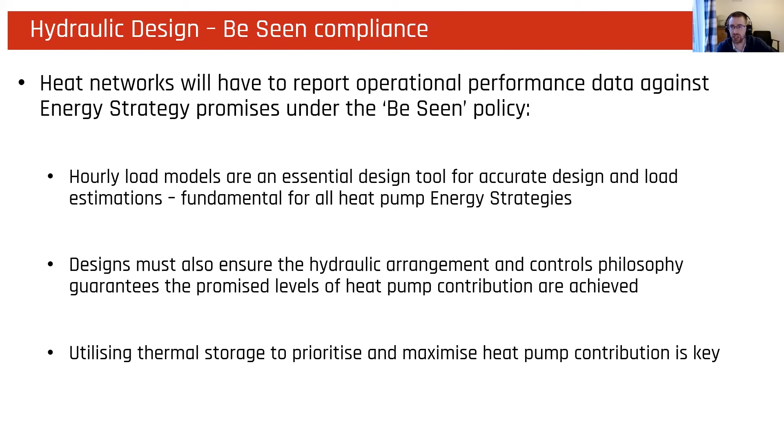In terms of technology selection, my experience in general is that air source heat pump is the de facto starting point. Particularly when you get into the site-specific challenges that can impact a site, around rooftop space—where are we going to locate those heat pumps? Do we have enough space? I've got a very, very tall development, so I can't locate the whole plant room on the roof, so I've got to go from the air source to ground and then back up again, and it starts to become maybe quite inefficient.

Alternative technologies such as ground source or water source can be quite attractive in those examples, and they can be very technically feasible options. Particularly with RHI on ground source, that can alleviate the CapEx constraint associated with ground source. That's what Chris is going to talk about later, and why we've had a really good partnership with Chris and Genius Energy Lab - looking properly at ground source at stage 1, stage 2, and doing a proper site-specific technical feasibility study will answer those questions rather than discounting ground source too early on.

So the differences we're looking at: in general, air source is going to be a lower cost solution than ground source. However, we're going to need more rooftop space or plant room space to make that possible, which in some developments is simply not an option. Ground source is going to have much higher impact on your construction program than air source, and open loop is going to have significantly more program impact than closed loop due to the Environment Agency permitting requirements associated with that.

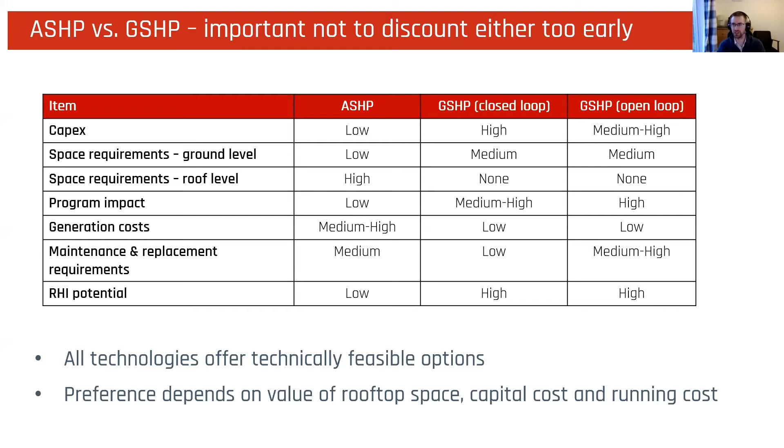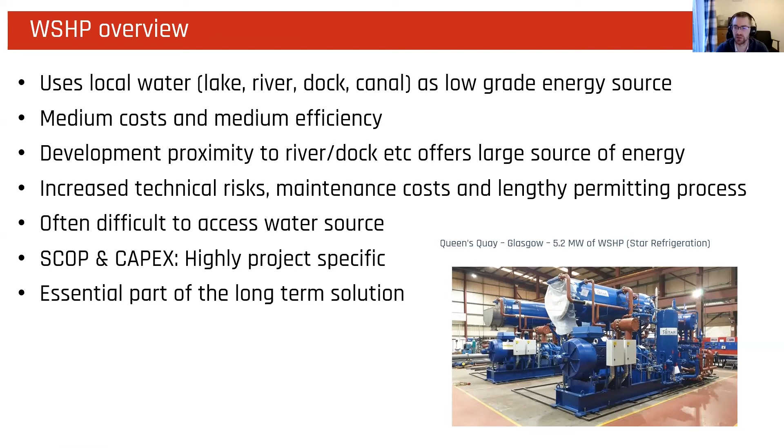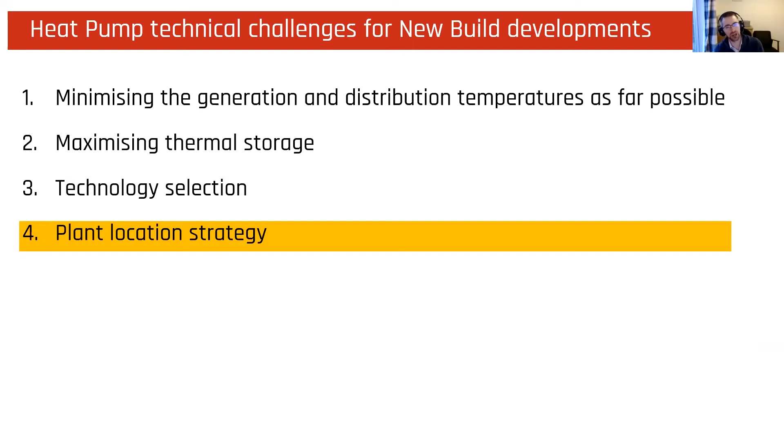So the last one - probably the one I've spent the most time involved with - is plant location, which often gets rolled back a bit to the drawing board. For air source heat pumps, one option is to have a split strategy where the air source heat pumps are located on the roof, with thermal storage distribution and maybe some boilers at ground level, and then we distribute out from there. Where rooftop is relatively restricted but there is some available for air source, that's probably likely to be the optimal strategy.

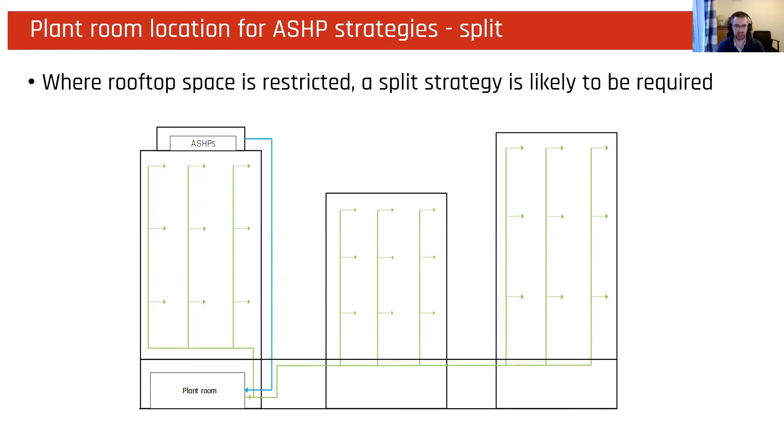Something I wanted to highlight that is often discounted too early, but is then brought back on the table when further constraints make the original energy strategy not viable, is entirely rooftop package plant rooms, even for hybrid systems involving gas or electric boilers.

Look at the space your solution needs. Try to understand whether it's actually a better solution for it all to go on the roof. You're removing a flue going through the building, and potentially you've got to take the gas up there, but there are pros and cons. Sometimes this can be overlooked, but it's worth considering at stage 1, stage 2.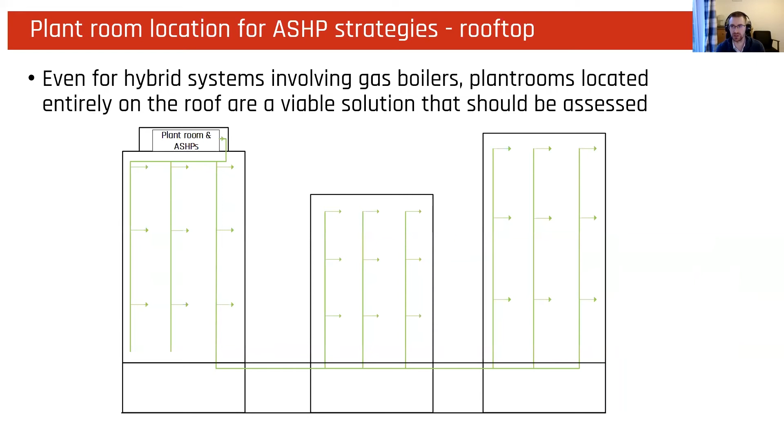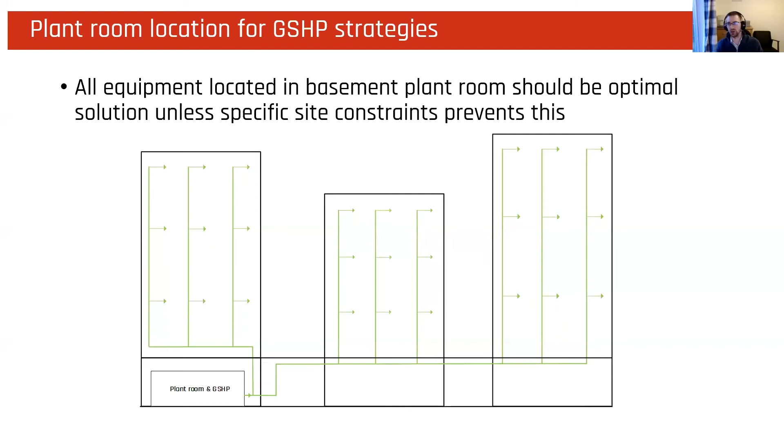And with ground source, you're likely to have a single ground level plant room, trying to find the optimal location for that, and then distributing site-wide from there without any need for a rooftop plant.

So from my perspective, trying to wrap up quickly to catch up some time, it's all about starting with the dwelling and building, because temperatures are going to dictate how efficient and how cost effective your system is to run. Thermal storage is key.

It provides you operational flexibility. It can reduce your required heat pump capacity. So don't just ask what's the minimal thermal storage I can get away with, or that I can fit in my plant room without really challenging it. It's what benefit would additional thermal storage provide my system and my residents?

And then challenge your spatial constraints. Can you dig a pit in the energy center to make the thermal stores longer, but without increasing your spatial footprint? Really challenge that design to make sure you're getting the most out of thermal storage.

And then make sure the hydraulic designs are being backed up so we can prove this energy strategy, and we've got confidence that when we commit to this, it's going to meet our promises.

Challenge the technology selection, make sure it's in line with your preferences from a developer's perspective, and from a consultant's perspective, make sure everything is being considered on the table within site-specific constraints. And optioneer plant room locations at stage 1 - a common theme, particularly on this one, is do not take options off the table too quickly, because sometimes thinking again can put a different light on the situation and give you a more optimal solution.

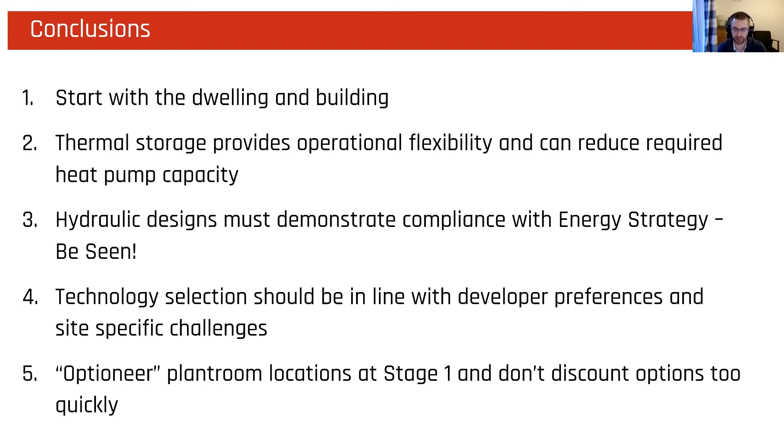So I'm going to hand over to Chris. Chris, do you want me to drive, or do you want me to hand over? Please, Michael. Yeah, if you wouldn't mind.

I'll drive through, yeah. So if we can just stay on the first slide for a start then, Mike. Good afternoon, and thank you to FairHeat for hosting what has been a fascinating day. I've been engaged the whole way through, I've learned a lot, and I've really enjoyed it. So thank you very much. And thank you also to Tom for your very kind introduction and promotion at the start of this session.

So our relationship with FairHeat goes back over a year now. Genius Energy Lab, we're a high-performance small consultancy providing ground source heat pump advice from design through feasibility study. We actually did a couple of days training for FairHeat just over a year ago, and it was great to see the attendance from the FairHeat team - it was a well-attended session, with some fantastic interaction.

And I think what became clear to the team during those 2 days was that there was a need, when we talk about ground source, to get involved with some specialist advice, or to maintain that involvement. So as a result, we've done a couple of studies during the course of this year, which we're going to talk through on an anonymised basis, because they're real projects with NDAs in place.

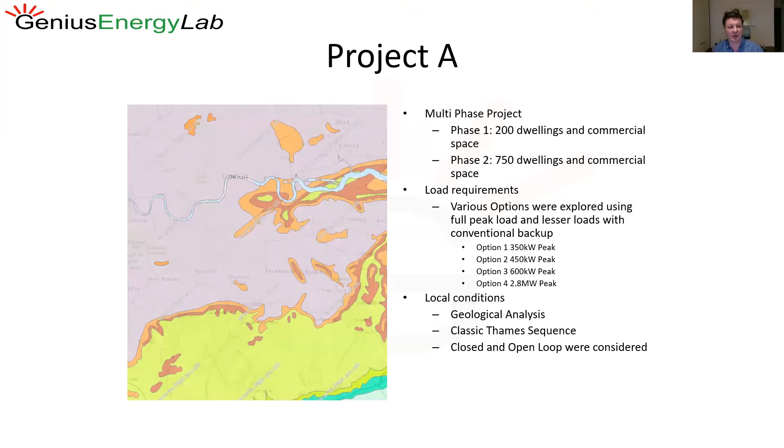And that brings me on to another very quick point. Cooling is incredibly important in ground source. If you've got any cooling locally, could be just some shops to serve the development or so on, anything like that is worth grabbing hold of with both arms and keeping control of it.

Thanks, Mike, you're telepathic, it was fantastic. I think I'll just touch base on one item, is that the closed loop in particular, which came out best on this project, is a long-term asset that's going to be there for 50 or 100 years and can be operated much like the gas, the electricity and the water infrastructure has been over the past many years.

They are heavily influenced at the moment by the spark gap in the UK, so the difference between gas and electricity price. A rebalancing of that, because quite frankly, the gas price at the moment is subsidised and the electricity price is levied. And the justification for those levies is that electricity was historically a high carbon fuel. It's low carbon now and getting lower every day. So the rebalancing is really on the cards between the gas and electricity price, and that will really affect those run costs ongoing.

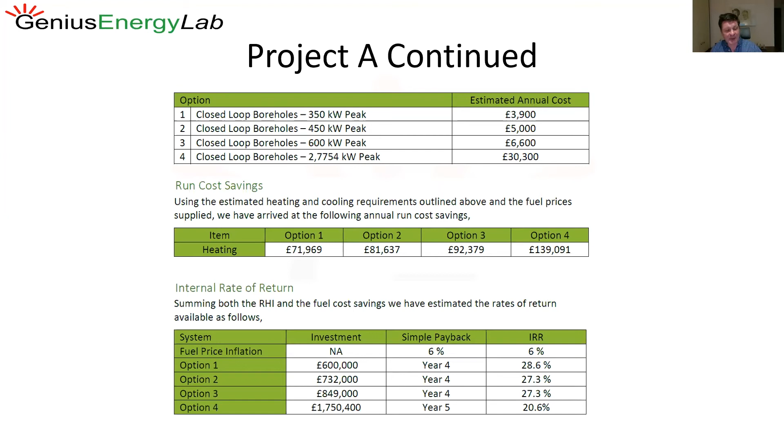And then we did the IRR calculations you can see there. So it's typical of what we're providing for FairHeat.

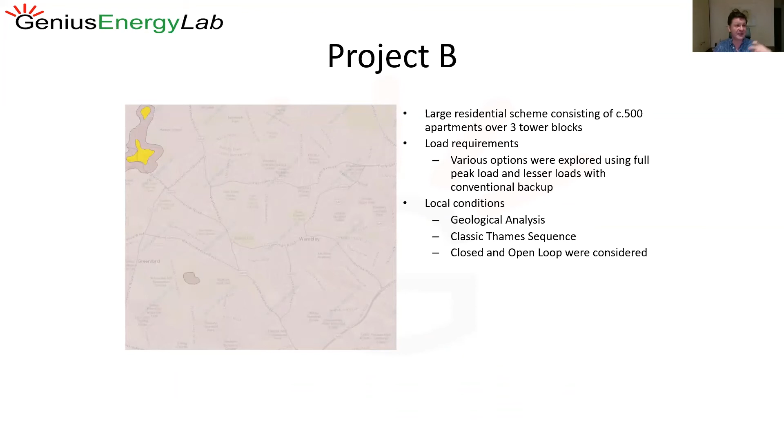Project B, slightly different spin on this. Geologically, again, very similar. So it's a London project again, but that specific analysis is very important because the relative thickness of those layers varies across London, with their conductivity and their opportunities for open and closed loop changing as well.

So just to talk about this in a little bit of detail, the importance of building loads. Oversizing has been talked about today. Oversizing from a ground source point of view is catastrophic from a cost point of view, but also we need to understand the annual loads. So we start to break these loads down by month in order to give us adequate ground loop design information. And that's very important, I think, for us.

And it came out in this one, 56 bores at 240 meters were required to provide those loads in that table. I think it's really good working with FairHeat. Some of the best information, quality information we get is from FairHeat, as Mike mentioned earlier on.

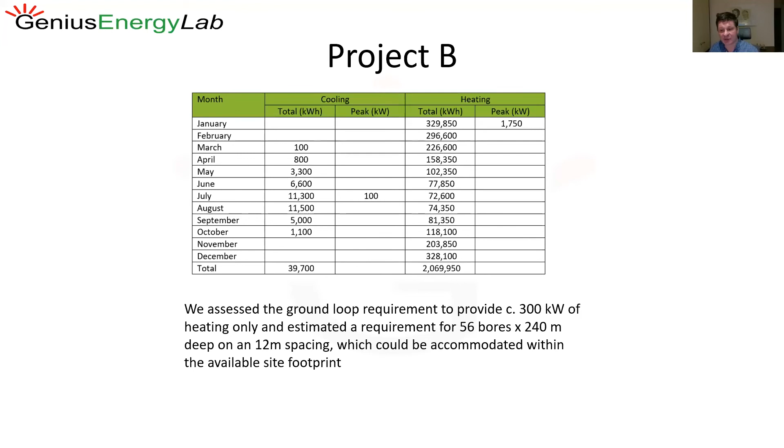Just a talk very briefly on that before we get on to the next slide, is that the ground loop is a finite resource. And so we can run out of steam in that ground loop. It's not like buying more gas or buying more electricity. We can actually depress that temperature to the point where the system starts to struggle. So the importance of those loads is really important when we're talking about particularly closed loop modelling.

And also phasing is important. In a 4-phase project, we really need to consider all the phases when we're looking at what that loop infrastructure needs to be when we're actually dealing with phase 1.

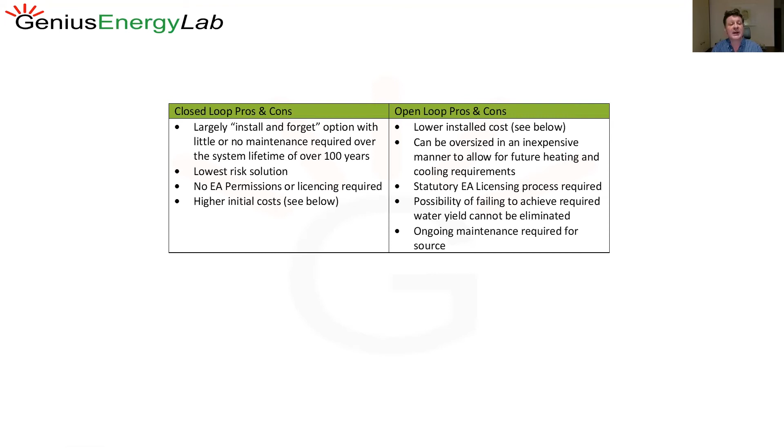And then again, a theme from the morning session, the importance of heating and cooling. Because this project was looking at both closed and open loop, we took on some feedback from the customer and looked at the pros and cons of the two technologies. If you want to see some more information on the pros and cons of open and closed loop, there's an excellent session of webinars hosted by the Ground Source Heat Pump Association, which goes into this in a bit of detail. So conscious of time, can I have the next slide?

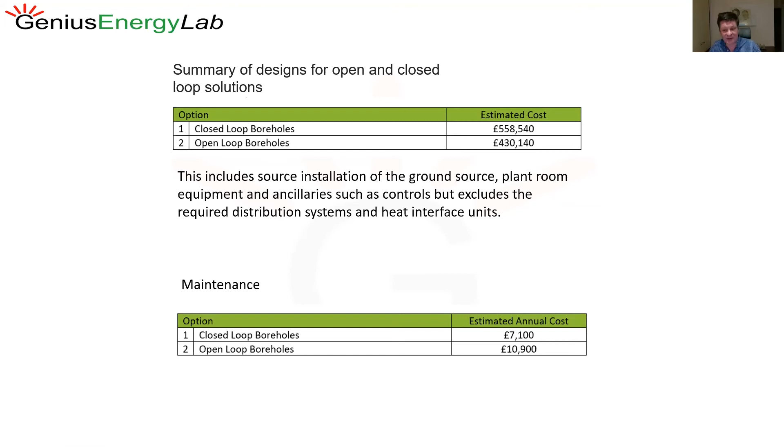So again, we looked at the differential cost between the closed loop and the open loop options. And this became a study not so much of different size options, but different technologies interfacing with the ground. And then final slide, please, Mike.

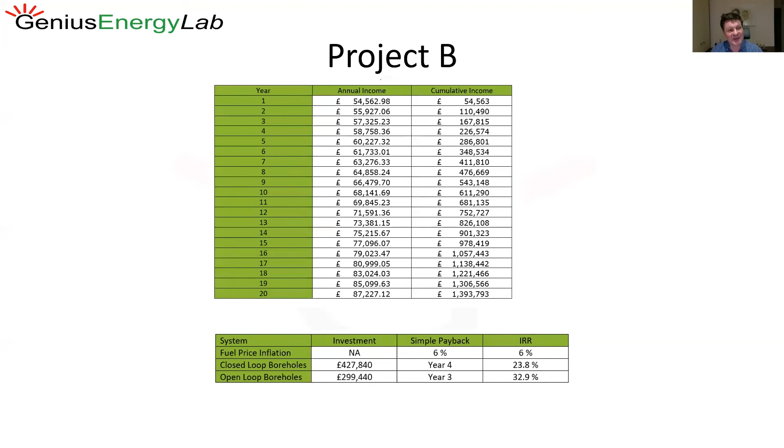Yeah, so finally, incentives. Just a very brief word on what Mike touched on earlier on. The RHI is tailing out now, and you can see some of the returns from the RHI were significant. But we are looking at a time of flux in the policy environment. The market is doing very well, regardless of that, with much more drivers coming into it. Rooftop equipment, for example, as Mike mentioned earlier on. I'll leave it with that, and I very much look forward to participating in the panel discussion.

Okay, yes, I've invited Paul Carty, Director of Construction at Gallimore, that we've worked with as a case study, where it's a project that wanted to transition from CHP to air source heat pump strategy, and Paul's just going to talk about, from a private developer's perspective, his perspective of the challenges and the benefits that process has had.

Hello everybody, can you hear me? Yep. The video won't start there, but that doesn't matter. You have a very dodgy photograph of me up already.

So okay, listen, we engaged FairHeat, well, must be 18 months ago now, Michael, on a project in Dublin, Ireland. If you want, can you slide the slides forward? So what we have is a development in Ireland here. It's 435 apartments, a primary care centre, and about 4,200 square metres of other uses within the development. As you can see from the images there, it's an estate with 5 building blocks.

So when we approach this project, it's a 200 million plus sale. It's an institutional sale, and the people who would be purchasing this development, who are in the process of purchasing, have a very strong due diligence team. So when we approached the project, obviously the heating was a very important concern for us.

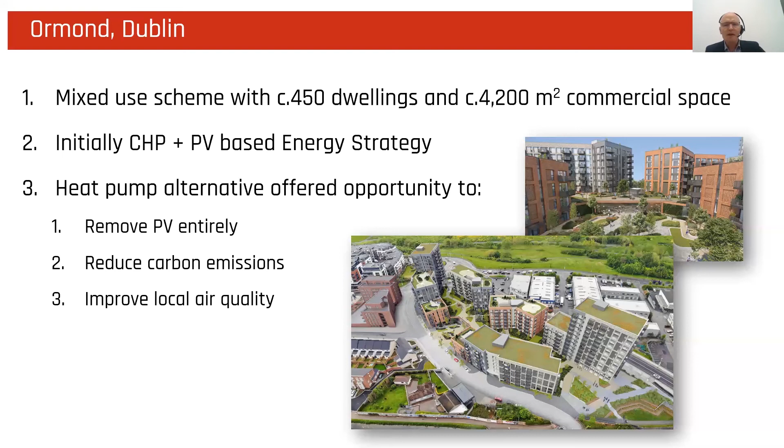For the heat pumps, we looked at lower levels of the development, and we put the Mitsubishis up on top of one of the taller buildings at 13 stories. The reason we did that was several: one, we had slight concern about noise - they're running at 59 dB, which is noisy enough. There were other factors about getting sufficient air around them, and things such as ice and the visual aesthetic of them. So we put them up on a roof. We found that we could get eight CAHV units on the roof, taking up a space of less than 100 square meters, which was important to us, because the equivalent PV was coming out nearly 900 square meters.

On this development, the roof space was important to us, because part of the amenity in the external space was the various terraces, so we didn't want to use PV. In order to accommodate this thermal storage, we redesigned the ground floor level. As part of the air source heat pump system, the 8 heat pumps, we matched that with 8 250 kilowatt Hamworthy boilers. Michael's previous presentation fed into this completely. We ended up with 27 cubes of hot water, and we chose to go to the lower 60 degree generation staging.

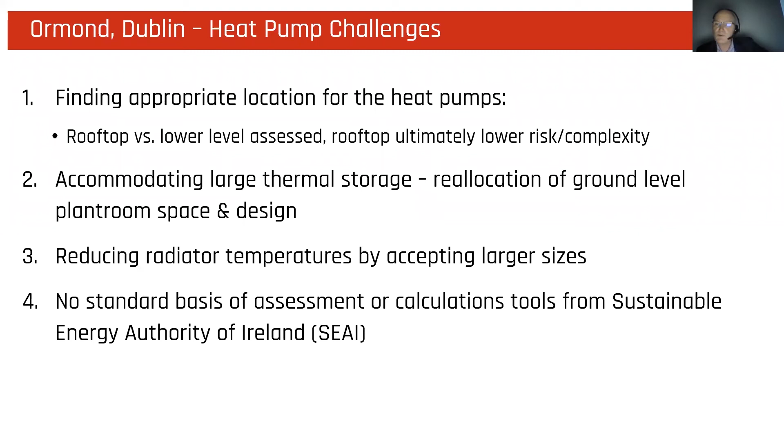In terms of the air source heat pumps, there is actually minimal disruption to the original architecture. We were able to put the air source heat pumps up on the roof. For the gas boilers, we changed our plant room - we had an energy center, and then a cold plant room. 350 square meters for both has served the entire estate, so that has worked out very well.

We have put this into our BIM solution, so we're up at level 2 on the integration and federation of that model. The generation equipment we located all in one of the buildings, Block D, which was the first building to be handed over. It was very important to us that the entire energy center was complete within 2 years of the first handover, because the development will have 5 different handovers.

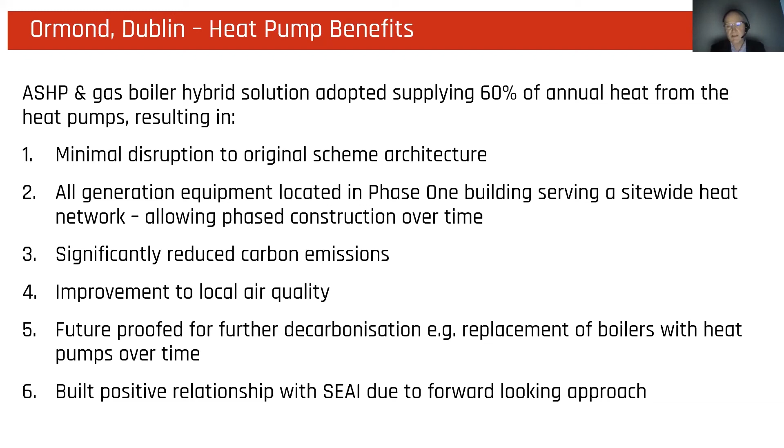And I have to say thank you to Michael and the guys, we built a very good relationship with SEAI, and I think they'll be looking at Ormond as a test case, as we will be as we're constructing it. Is there another slide, Michael? Yeah, so that was good. Paul, thank you very much.

Okay, I think we're moving into the panel now, Tom. A little bit, well, significantly over. I tried to be quick. No, Paul, it wasn't you. Well, one good thing about it was with COVID, poor old Michael and the guys couldn't come to Ireland, so we have more Guinness.